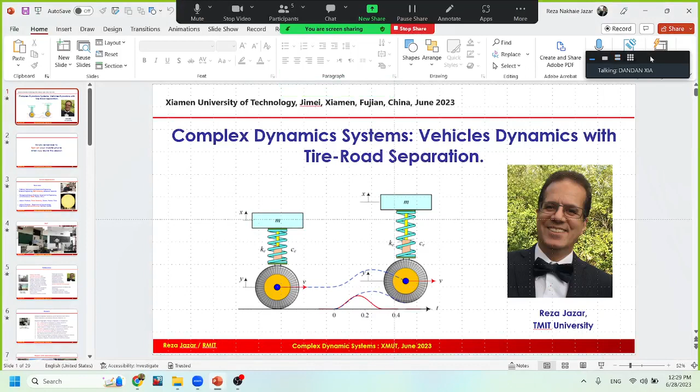Once again, it's my honor to be a part of Xiamen University of Technology. Today I'm going to talk about complex dynamic system. I'm going to tell you what a complex dynamic system is, and specifically talk about tire road separation.

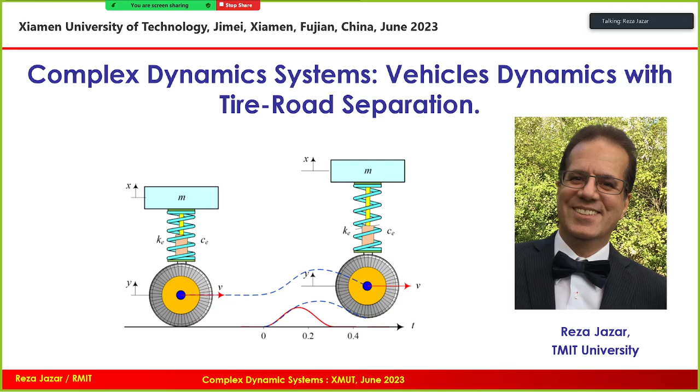Before going to the topic, I'd like to introduce myself. My current appointment is Professor of Mechanical and Automotive Engineering at RMIT University, and I am Adjunct Professor of Xiamen University of Technology. I love this title. I have very good memories from Xiamen University in the past before COVID. I was lucky to be there to teach a few classes, and you can see my photo in classes. Hopefully it's going to happen again.

I was lucky to work with many universities, as you can see, American, Canadian, and Chinese universities, and Xiamen University of Technology as well. Personally, I work in nonlinear dynamics, nonlinear vibration, very close with what Professor Dai is doing. Because of my job, which is part of automotive engineering, I switched some of my research area to be related to automotive vehicle dynamics and so on.

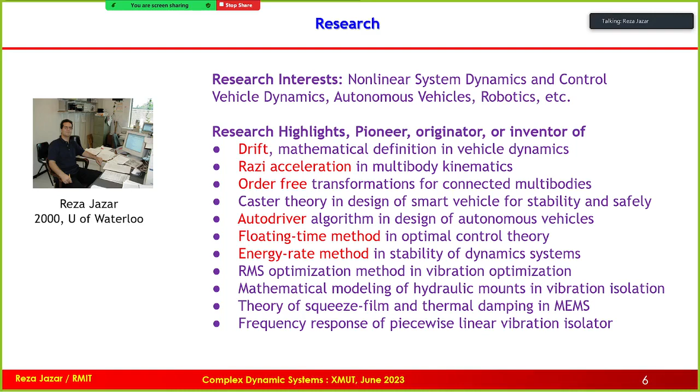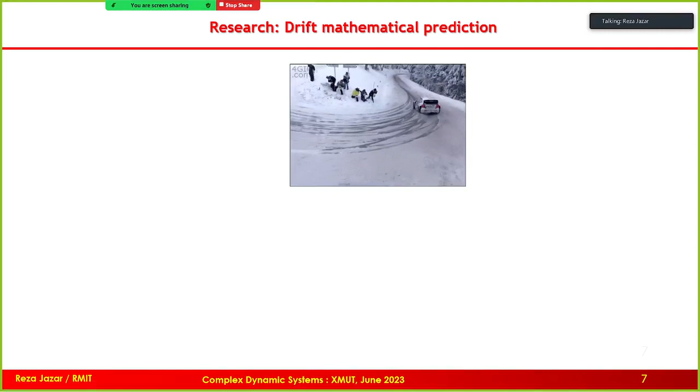What I'm working on right now for a few years is the mathematical definition of drift. What is drift, which is a very interesting topic, is this. I hope you can see the video very well. This action of automotive is drift.

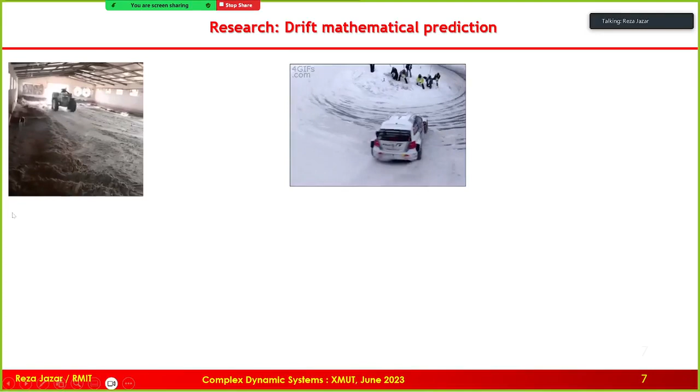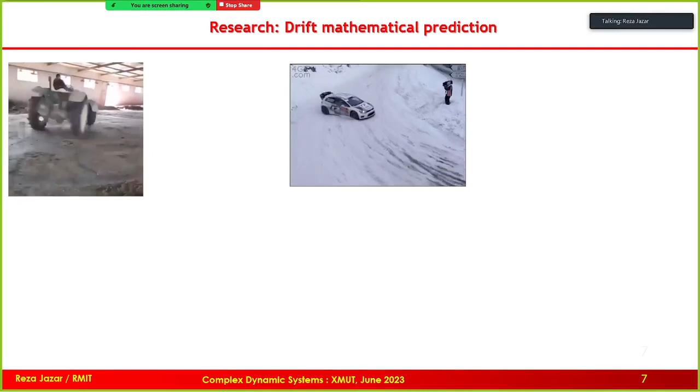Here you can see a very funny video, which somebody with a tractor controls very well. I'm sure he doesn't know about the mathematical definition of that, but he's doing a very good job.

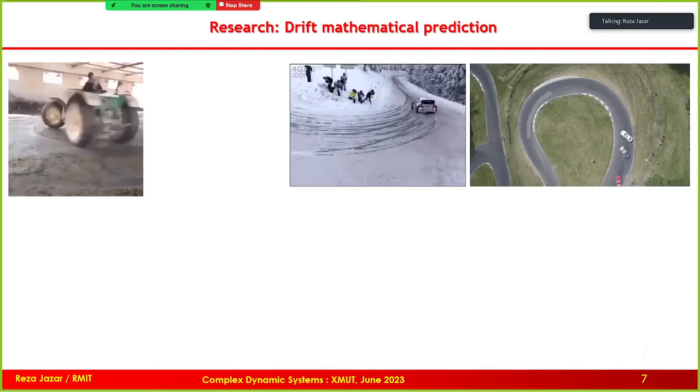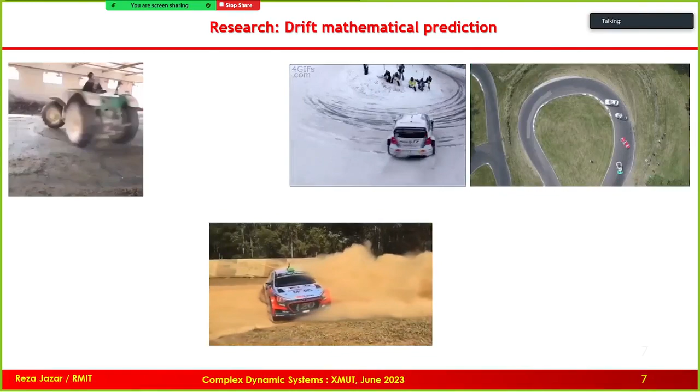Here is another video of drift. Most of them are sports drivers. And here you can see a fantastic maneuver. It was a rally in Kenya a couple of years ago.

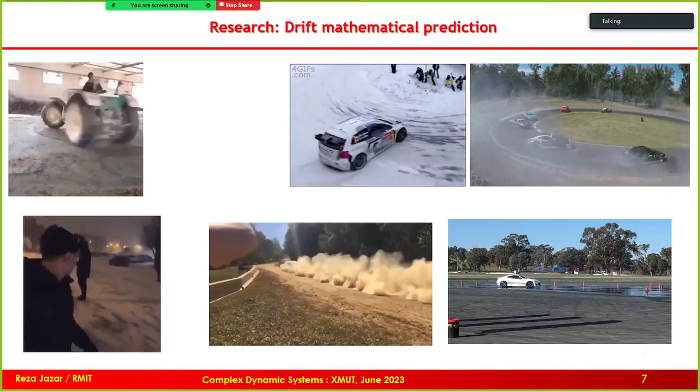Drift is not just for vehicles. Drift can happen with motorcycles as well. I'm coming in hot. I'm coming in hot.

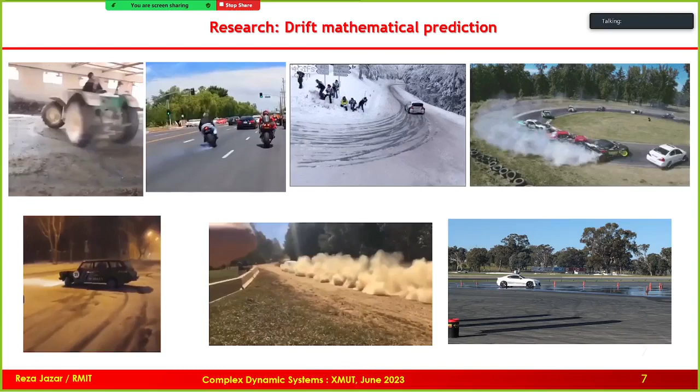Okay, maybe someday I'll be lucky to give a presentation about drift. But today I'm going to talk about complex dynamic systems.

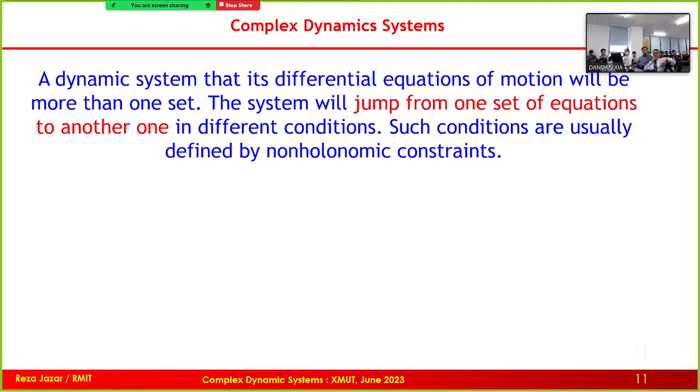By complex dynamic system, we mean a dynamic system that has more than one set of differential equations, more than one set of differential equations. The system switches from one set of differential equations to another set according to some condition. Those conditions usually are nonholonomic constraints. I will talk about nonholonomic constraints later, but this is what I'm going to talk about.

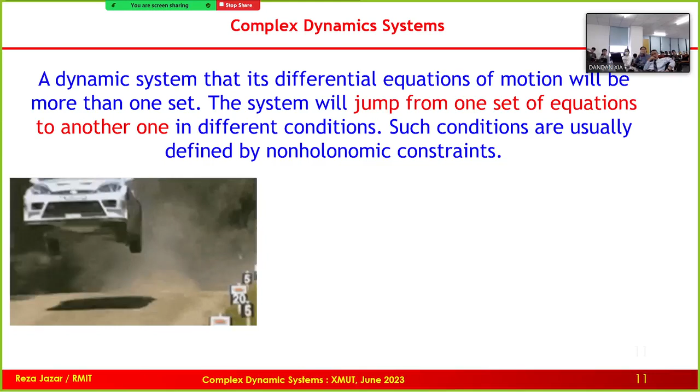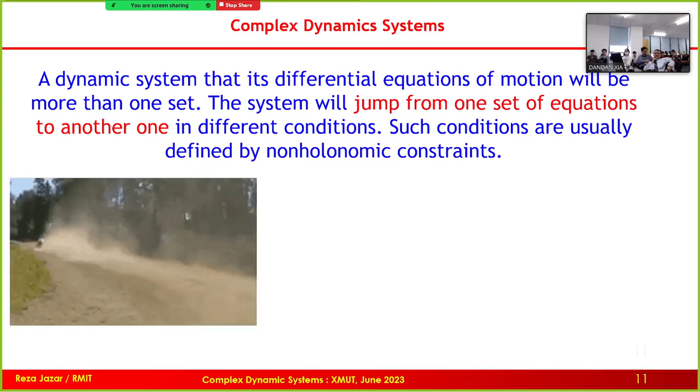When the vehicle leaves the ground and is flying in the air, as long as it is in touch with the ground, we have a set of differential equations to study the motion. When it is off the ground, the differential equations are different. How we match these two sets of differential equations and their solutions is the art of mathematics. Today I'm going to talk about that in detail.

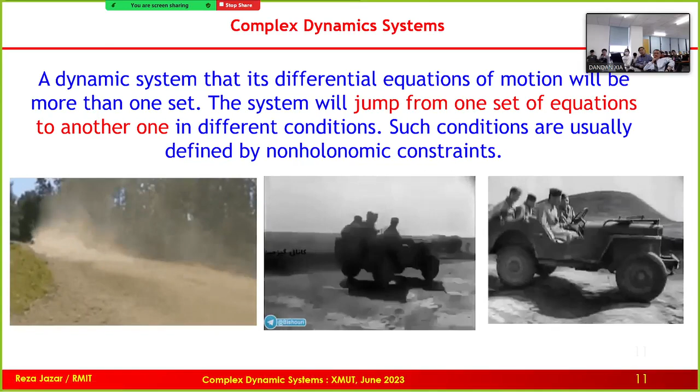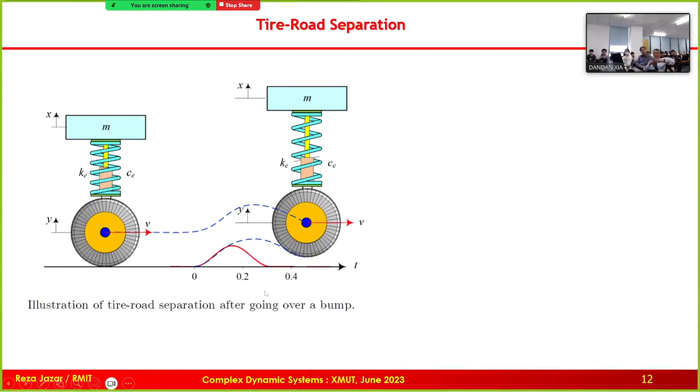This is what you see on tire road separation. It's easy to do the experiment and with sensors measure whatever we want, but mathematical modeling is my focus today. This is what you see: a vehicle is moving over a bump, it jumps over the bump and separates from the ground. Here is an experiment.

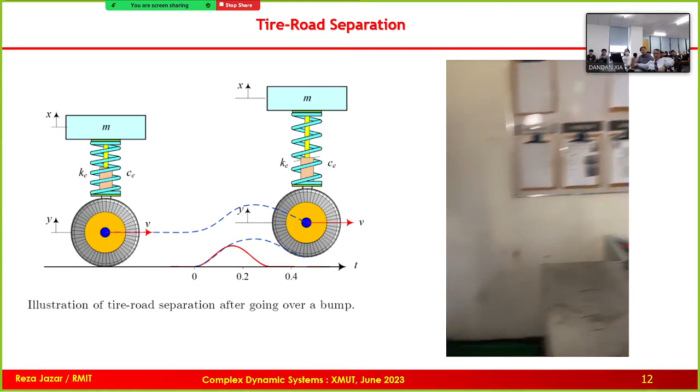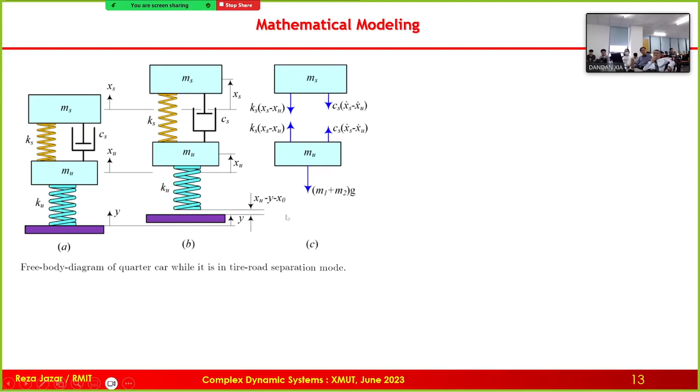I'm sure everybody, all students, are familiar with that. We derive the equations of motion by balancing the total force equal to mass times acceleration, as you know, the Newton method. So sprung mass has this equation. Again, sprung mass is the mass of the body.

This model is called the quarter car model. Quarter car model means we assume one wheel, one shock absorber and spring, and on top, one quarter of the mass of the body. It means one side, one corner of the vehicle is good enough to study the vibration. It's very traditional, a very good model, and it is up to 90% accurate.

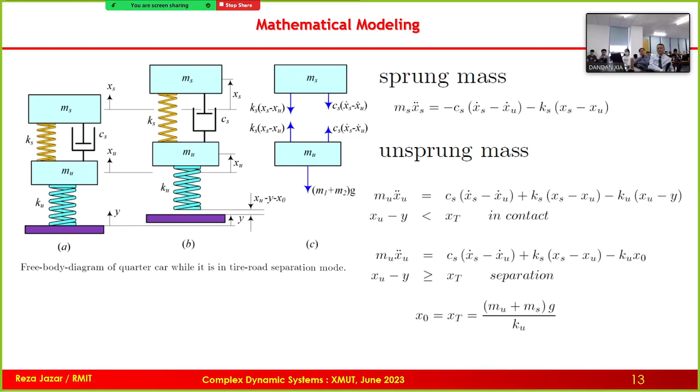Xt is static deflection of the tire. Assume that the vehicle is just standing, no motion. Mass of the sprung mass and mass of unsprung mass together are pressing the tire. How much is the tire going to compress? It's indicated by x sub t here. X sub t on the bottom, that's tire static deflection. I'm going to use that very soon in the next slide.

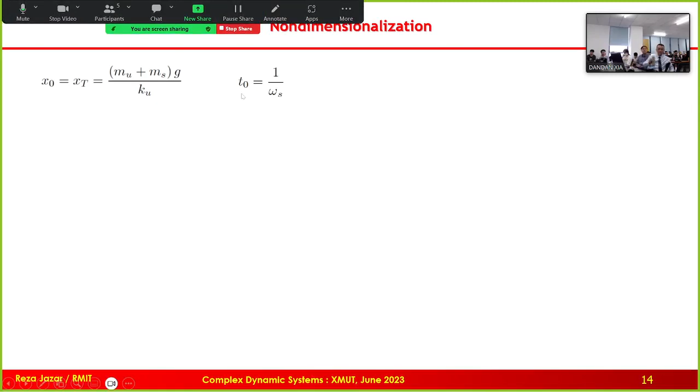To make the solution general for every type of tire, every type of vehicle, we have to non-dimensionalize the equations, meaning make the equation dimensionless. To do this, we have to pick one constant for displacement and one constant for time. Here I'm using tire static deflection as x0, which is length, to non-dimensionalize the equation.

And for time, I'm using t0, which is the inverse of the natural frequency of the sprung mass. Based on them, I'm going to introduce new variables: capital Y, which is road excitation; capital X sub U, which is unsprung mass displacement, non-dimensional; X sub S, which is sprung mass displacement, non-dimensional; and tau, which is non-dimensional time.

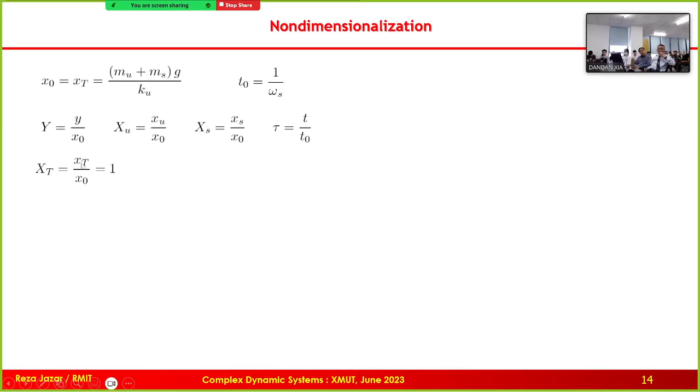Based on that, the static deflection of the tire now would be 1. So displacement of 1 means deflection of the tire. Here, as you can see, x sub t, which is the dimensional static deflection, divided by x0, which is the same value, equals 1.

Again, I remind you that we make the equation non-dimensional. First, to make it general, meaning we study one vehicle, the solution would apply to every vehicle. Second, we minimize the number of parameters. So non-dimensionalization is a very good step in studying vehicle dynamics, not just vehicle dynamics. An absolute minimum number of parameters appears here.

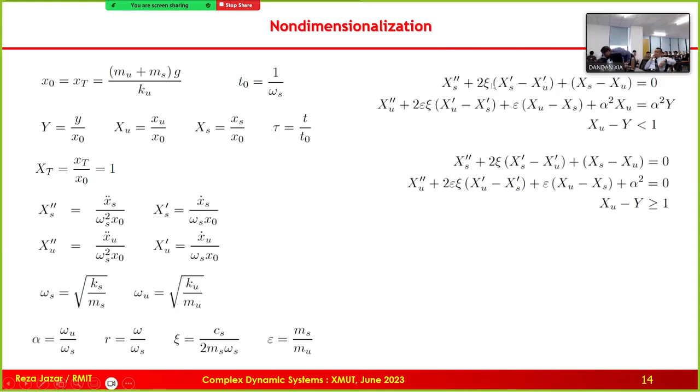Based on them, the equations of motion now are different. I have two sets of equations: the first set, top right, is for contact with the ground; the second set is for separation. Now we have the conditions for separation and contact. So my job is to solve these two equations and recognize when the tire leaves the ground, and when it is in touch with the ground.

The condition for that would be xu minus y equal to 1. Less than 1 is touch. Greater than 1 is separate. What is that? xu is displacement of the center of the wheel.

Y is the displacement of the ground. If the distance between the center of the tire and the ground, the relative displacement, is more than the static deflection, I'm losing contact. So it is very easy to explain.

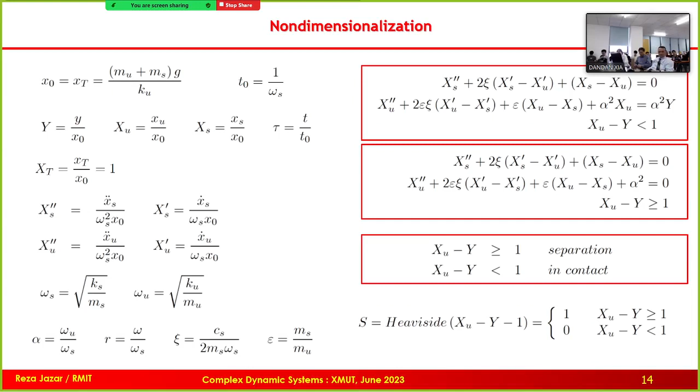Okay, now let's study frequency response first, and I'm explaining why frequency response first.

For frequency response, you are familiar that we assume the input, in this case the ground, is moving up and down with constant amplitude and different frequency. I'm going to change the frequency later. So the frequency is unknown — it is harmonic excitation.

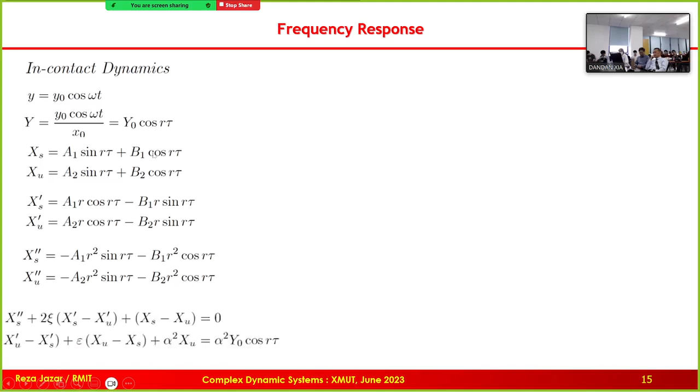Based on that, as long as we are in touch, we are going to have a harmonic response. So I'm assuming y is y0 cosine of omega t, and in non-dimensionalization, it's y0 cosine of r tau. Based on that, we get x prime, x double prime, substitute in the equation when we assume they are in contact, and then we get the solution — these are the unknown coefficients xs and xu.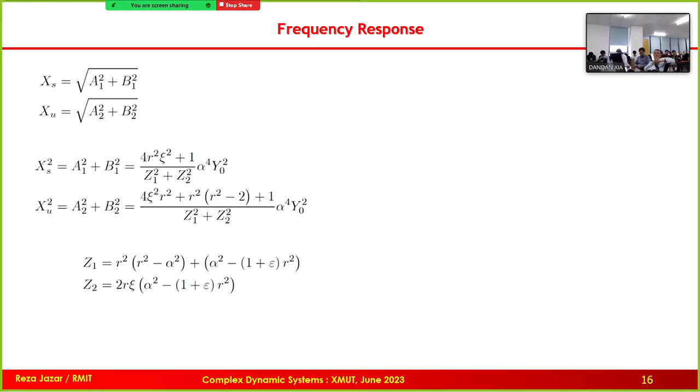So analytically, we are able to calculate the frequency response as long as the tire is in touch with the ground. What does this do for us? We can show the frequency response of a quarter car. So far, everything is linear — there is no nonlinearity.

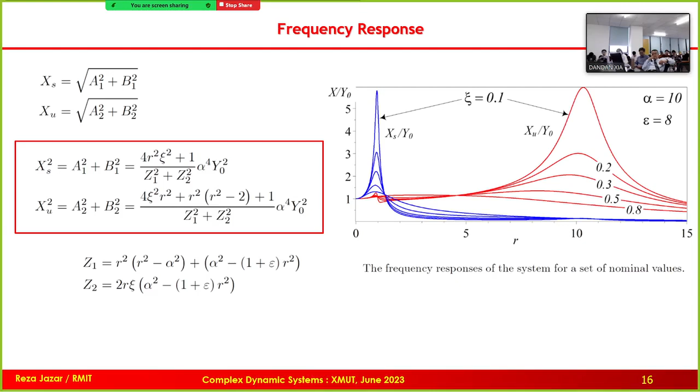There is no separation considered yet. Is this frequency response correct? It depends on separation and non-separation. I'm going to show you that not all of this frequency response is correct — we are supposed to detect what part is wrong, and we solve that.

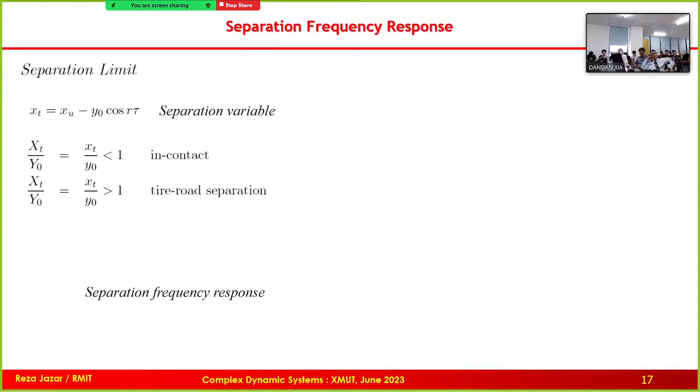Okay, separation limit is here. Let's define a new variable called the separation limit, x sub t. X sub t is the relative displacement of the unsprung mass and the road — meaning tire and road. The difference between those displacements is measured by x sub t here.

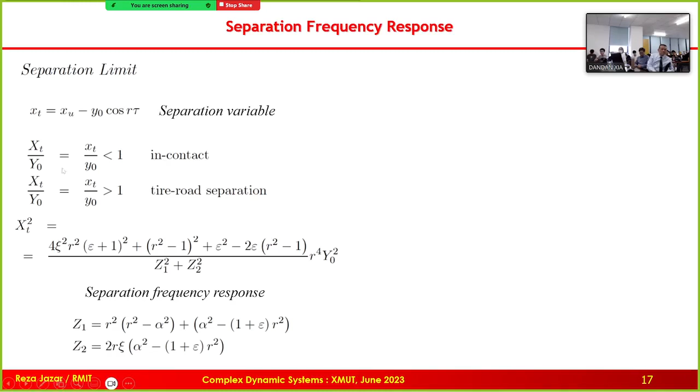So when x sub t is more than 1, we have separation. When it is less than 1, we have non-separation. Let's find the frequency response of that, and you can see here capital X sub t. Here is the equation, and I'm going to plot that.

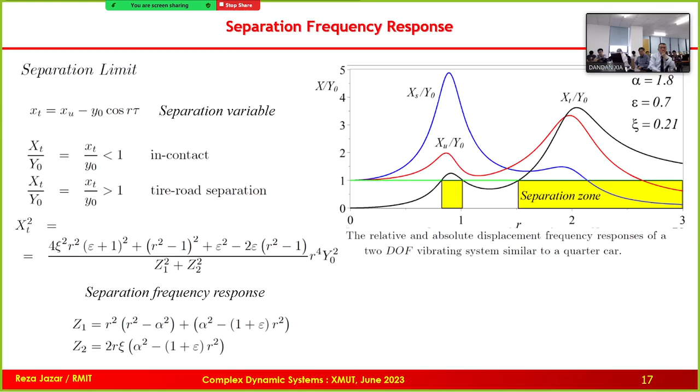Okay, so far we've studied that we are able to detect what part of the frequency response of the system can be wrong. Let me define the separation function: Xt, which was the relative displacement, divided by the amplitude of the excitation, is equal to that function. Whenever this function equals 1, we are at the border of separation.

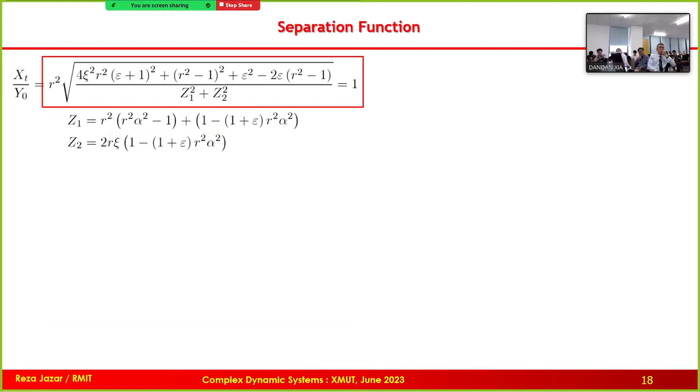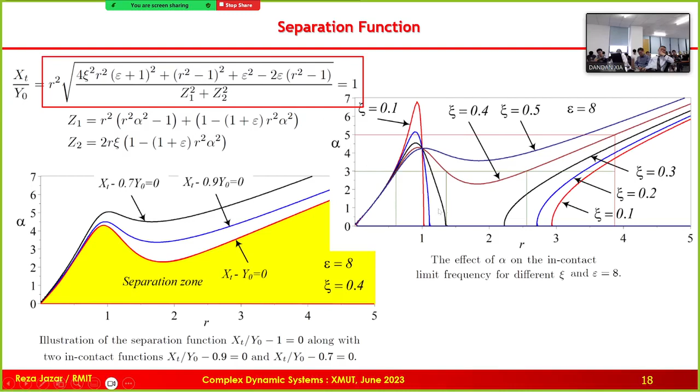We can do the same thing for alpha equal to 3, and you can see that we touch the curve of zeta equal to 0.4 at this point. Separation happens below that, and being in touch happens above that.

Now let's see some examples for a real car. These are some usual car numbers, actually for my car, a Ford Mondeo. For these numbers we get epsilon 8, zeta damping ratio 0.3, alpha equals 9 point something.

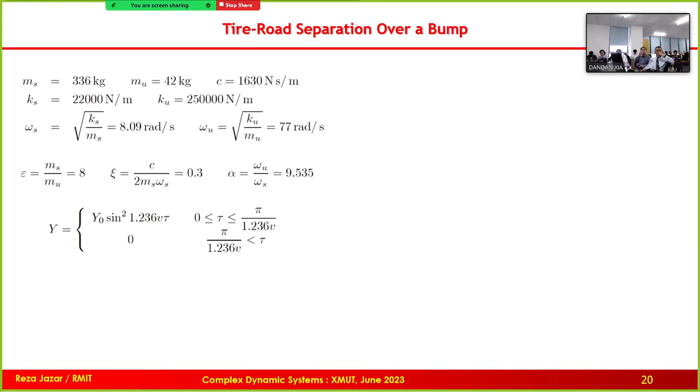We have a bump, usually modeled by sine square, and S means the separation function. Here I'm going to study the response over a bump.

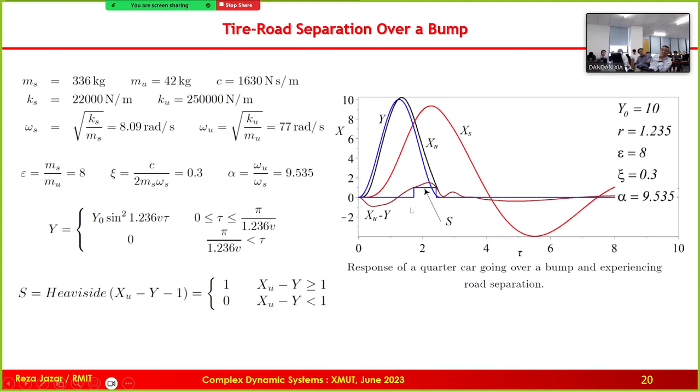Now look at this brown curve, which is XU minus Y, and I'm going to explain more later on. Here I wanted to show you that the S function is a switch to indicate when we have separation.

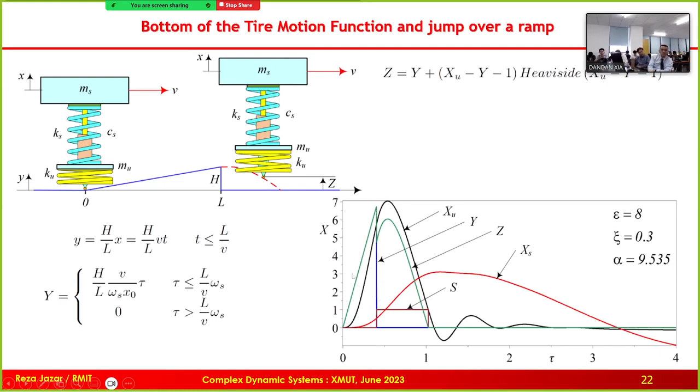First of all, look at the blue line — this part you see is green, I'll explain why. The blue starts from here, goes up, jumps here, and goes horizontal. This is exactly the same as the ramp here.

Again, this graph is not to scale, so don't assume the ramp is very high. It's very shallow — I explained the dimensions, I think 10 centimeters by half a meter.

Okay, now look at the black line. Black line here is the displacement of the tire, the center of the tire. Look at the red one, which is the displacement of the body of the vehicle.

Look at the S function, which is the switch for separation and un-separation. As you can see, right after the ramp, we have separation for a while, and then the car touches the ground. For this time along the horizontal axis, which is time, we are separated.

Now look at the green line. The green line is the variable Z that I explained above — the displacement of the point below the tire. When the vehicle is on the ramp, below the tire, the touching point is on the ramp.

That's why the green and blue are the same here. Right at the tip of the ramp, the tire will expand. This little jump here in the blue shows that the tire expands to the original length, so static deflection disappears. Imagine that we assume displacement of the springs happens in no time—we do not assume any time for that.

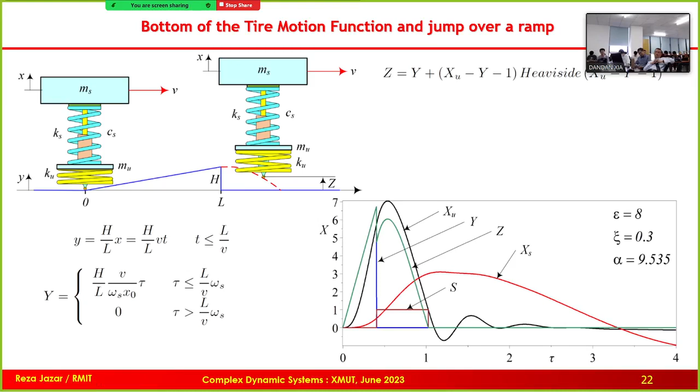As far as I see, all the mathematics are working very well. We are able to analyze the system when it is in touch with the ground, and we can study the system when it is off the ground. Now, what is the purpose of that? The study will go into the frequency response and see what part of that frequency response at the beginning was wrong. That's the goal of this study. So to be able to do that, we have to study harmonic response.

Harmonic response is like this: the vehicle is moving on a wavy road. When we increase the speed, it means the excitation frequency is increasing. So we assume amplitude is constant, but velocity changes to change the frequency. This is the equation. As you can see, for frequency of this wave, we have velocity, so velocity is associated with frequency.

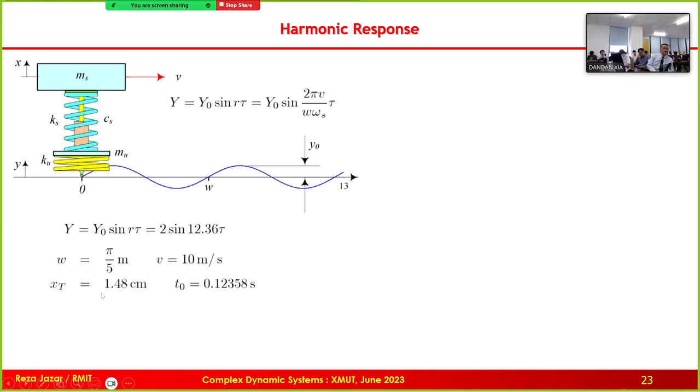Okay, one numerical example: as you can see, W0 to W is wavelength, which is pi over 5 meters—it's a very big one. Velocity is 10 meters per second. Displacement, static deflection of the tire, is around 1.5 centimeters. T0, which was a constant time, not important to us, is that much.

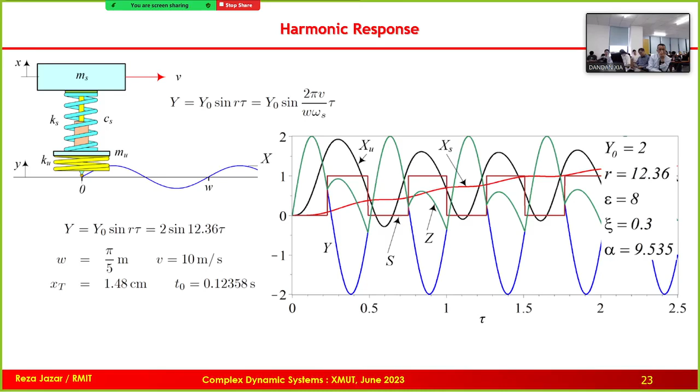Now, when you see this graph, we may assume it's a steady state after a while. But let me tell you, it's not a steady state as long as all variables don't show steady state. One of them, XS, displacement of the vehicle, is still going up to show that—later on I'll show that it takes more time to see a steady state.

But before going there, let me change the velocity and see the same thing. This is another velocity—where is the velocity? Velocity is in R, frequency. So when I say we increase the velocity, it means we are increasing the excitation frequency.

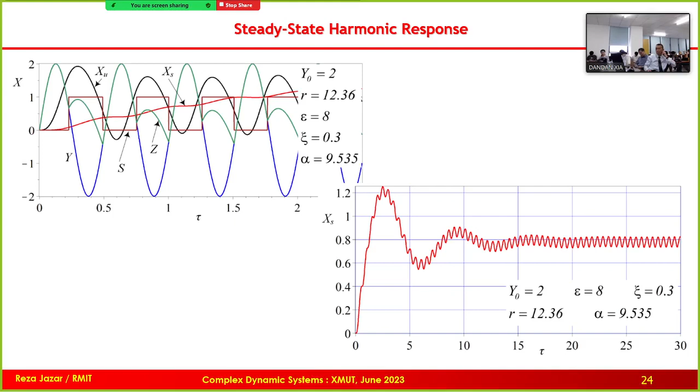So we have to wait, at least in this case, up to 30 time constants, 30 units of time, to see steady state for the vehicle. So our job is to do that. Let me review the harmonic response of the vehicle for different velocities. That's a very small, short velocity.

Change the velocity. Now we have separation. Look at the indicator of the separation, so you understand that we have separation. I showed everything. We can go into the detail, but it's self-explanatory. So as you can see, velocity changes, so frequencies change. Higher velocity. Beautiful graph, very beautiful graph. We can study every little bit of that.

My point is that one question comes to the picture: is it possible that the vehicle jumps over one bump and sits on the other bump? Meaning one of those bumps is totally skipped. I'm going to increase the velocity and see if it is possible, and whether our mathematical model can detect that.

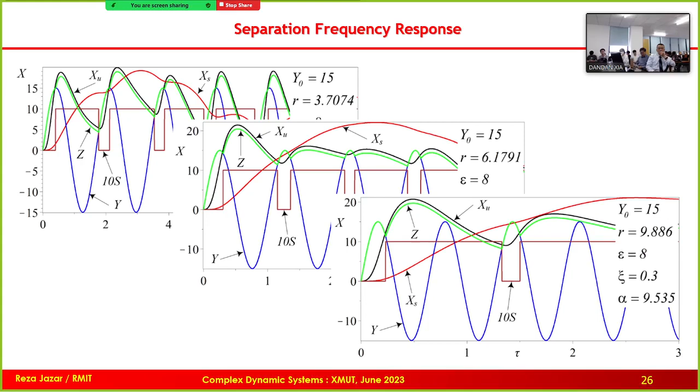Higher velocity, and what you are looking for to notice is the green one. Okay? Higher velocity, and look at the green one. And here is another. And finally here, look at the green line here. And here the vehicle is totally jumping over one bump and sitting on the third bump. That's very good, because I'm happy that the mathematical model can detect this type of strange behavior.

Okay, now I want to find the frequency response and detect what part of the frequency response was wrong. To do that, we trust the time response. We give enough time until it is settled down. Here you see that after 100 units of time, it's almost steady state, at least by visualization.

Mathematically, we have to detect the peak value of at least two of the peaks next to each other, and if their difference is within the limit, for example 0.001, meaning one out of 1,000 difference, then we accept that it is a steady state. So we adjust a tiny value to accept that it is a steady state.

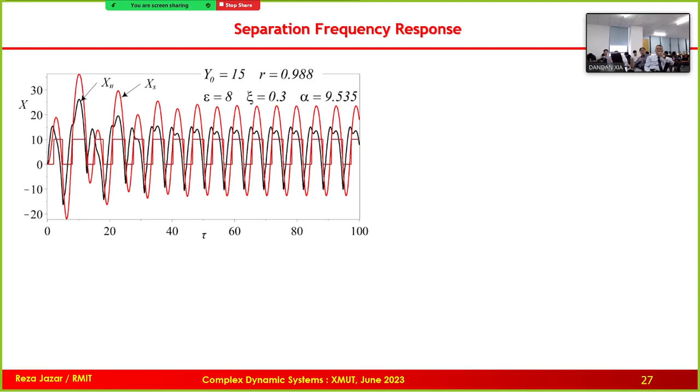In that case, we pick the value of the number, and then we change the frequency. We wait until it is a steady state. We detect the peak value again. We put them in a matrix, and then we plot that. We assume that it is the frequency response, or close to the frequency response. And this is what we get.

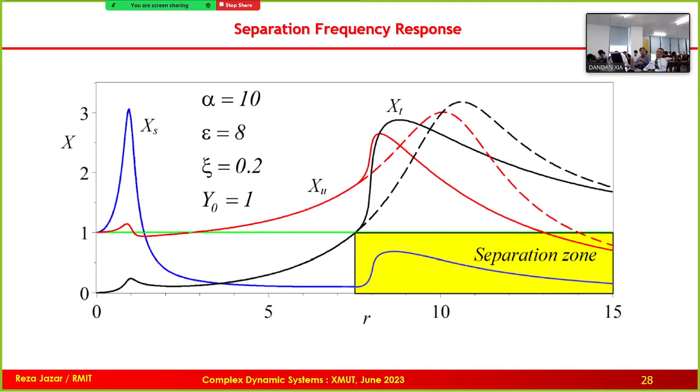This is a better graph. Here I showed the linear and nonlinear frequency responses together. Let's assume that separation makes everything nonlinear. So look at the dashed line. The dashed lines are linear, meaning assume that the tire is stuck to the ground. The solid line is separation.

First of all, look at the left-hand side before going to the separation zone. As you can see, on the left-hand side, the analytic solution and numerical solution are exactly the same. So it gives us enough confidence to trust the value of detection of amplitude for the separation zone as well.

Now look at the solid line in the separation zone. For example, look at the solid red line and dashed red line. The dashed line is the frequency response of the unsprung mass, and the solid line is the actual one when we consider separation. That's all I wanted to say.

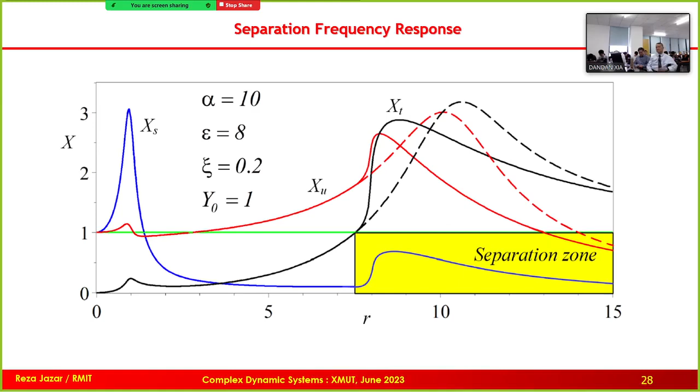So what I did was study one complex dynamic system, meaning a system having two different sets of equations. My goal was to find out if we are able to develop a mathematical model to study this for separation, touching, jumping, and to design or detect the differences in frequency response.